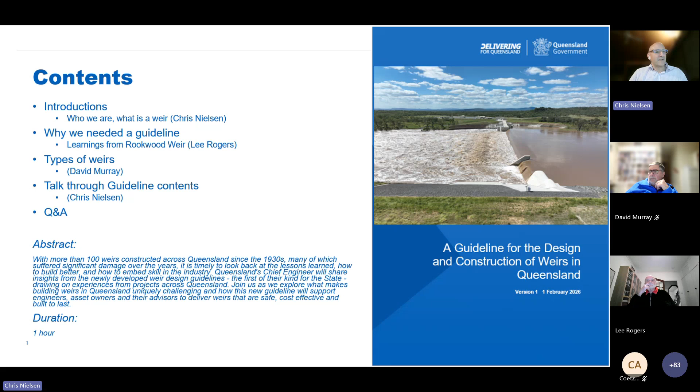Okay, I might just kick off then. So I'm going to be doing a bit of a tag team presentation. I'm going to be starting with a bit of an introduction and just give a bit of a scene setting. I'm then going to pass on to the two experts that I have in the room with me, Lee Rogers and David Murray. We'll then go through a series of presentations relating to the guideline, and then we can stop and have a Q&A at the end.

Very fortunate to have Lee and David working in the department after all these years. They can introduce themselves when they do their presentations, but just succinctly, public service in Queensland has been progressively reducing the number of engineers present, operating within the department and within the government. This has been happening since the 80s and 90s. We're now in a position where most of the work is done by consultants. There's nothing particularly wrong with that, but we do find that when it comes to making some of the bigger decisions, sometimes the knowledge base and the background and the context to making those decisions is not there. So we're very, very lucky to have David and Lee, and I really, they make me look good, which is great.

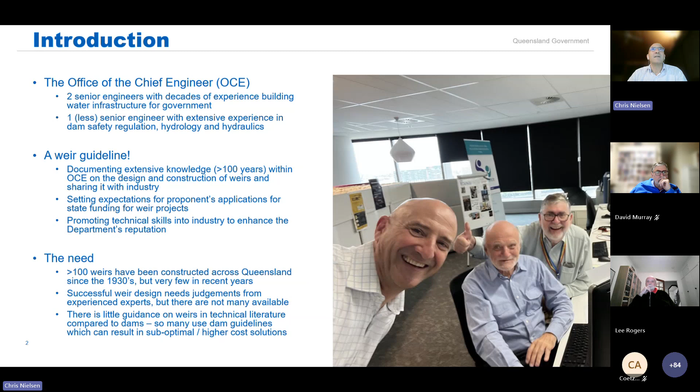I might leave it to Lee to talk a bit more about the basis for the Weir guideline. But I might just quickly touch on a couple of slides to explain the difference. And this is something which I didn't really pick up on myself until we started doing this exercise.

What is the difference between a weir and a dam? So a weir is a barrier across a watercourse intended to raise water levels on the upstream side for storage. So that sounds like a dam as much as a weir. It's generally located within the banks of the watercourse. Again, I guess similar to a dam, but differently. During flood events, it can be overtopped.

And usually when it is overtopped, and particularly when it's out of bank and severe flooding, you end up with a drowned flow condition at a weir. And that's quite an important distinction, because it means that once you get to some of the big flood events, which are the design constraints for dams, a weir is simply a submerged structure and it doesn't have those same forces. So it means that there's a very different force loading, and there's less safety obligations and less safety concerns as well as a result of that.

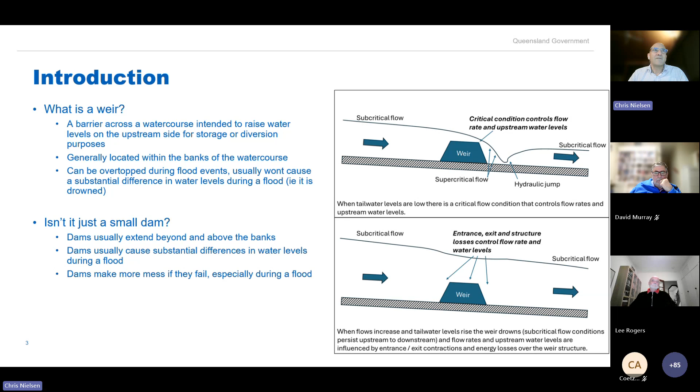As a flood gets worse at that particular dam or gets more severe, water levels rise, the force loading on that structure becomes worse, and you need a much, much stronger structure. Now, at the same time as that flood event was occurring there in 2019 with the gates open, further downstream is Aplins Weir. Now, as you can see, that weir is close to becoming drowned.

It's at bank full flows, and we're probably at a point where the tailwater condition is starting to result in less force loading on that structure than what it was when the flow was a bit less. So that's probably something to keep in mind. To me, that's an important distinction that we need to keep in mind between a weir and a dam. And that's really where we started from with this work.

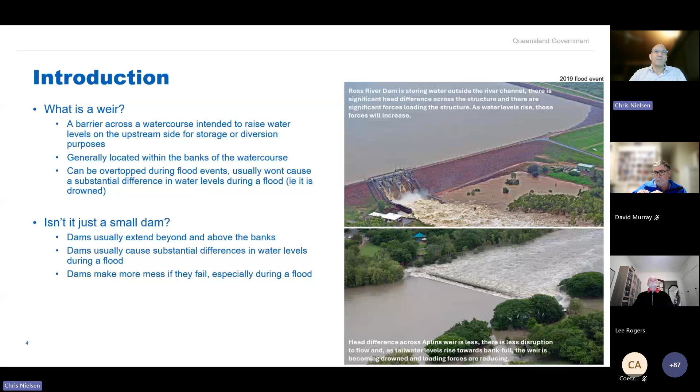So I'm going to hand over now to Lee, and he's in a way going to be giving us the origin story for the Weir guidelines.

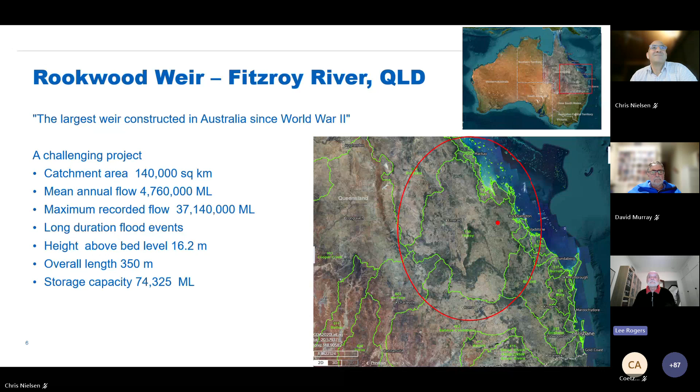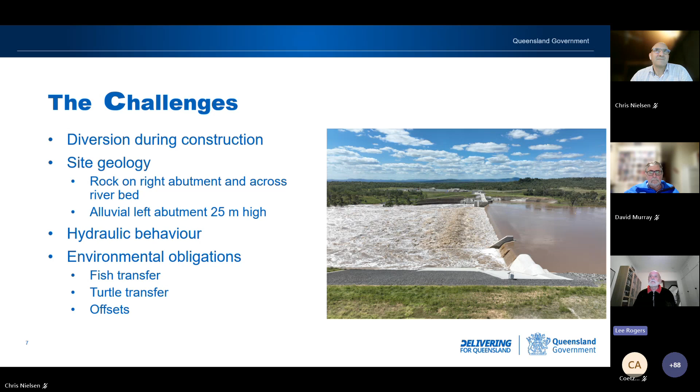And weirs now are far more complex structures than they used to be in the good old days because of all the environmental obligations, the requirements for fish transfer, in this case, turtle transfer for the first time anywhere in Queensland. And there were quite onerous offset obligations. The next slide, thanks, Chris.

So how was all this project implemented? Firstly, it was a joint Commonwealth government, state government initiative for funding of $367 million, which was the estimate at the start of the project. The balance of the cost was to be covered by Sunwater, which is the state-owned corporation in Queensland. It was also the development manager and became the ultimate owner of the weir. The design consultants are GHD. I'm not sure if they operate in South Africa, but they are a very big company in Australia.

The weir was constructed under an alliance arrangement with Acciona, which is a Spanish-owned enterprise, McCosker Contracting, a regional company in Queensland, Sunwater and GHD as its members. So the construction of the weir took 3 years, and the final cost was $569 million. The major cause of that cost escalation was the fact that the site was inundated 6 times during construction. The construction period was not 2 years, it became 3. There was a COVID shutdown for a month early on in the process. But that's the way of projects these days in Australia, cost overruns. So next one, thanks, Chris.

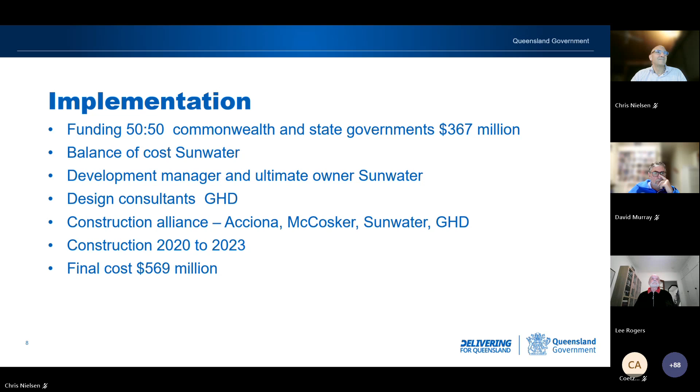So an important element of the whole weir design was the technical review panel that was established by Sunwater, comprised 4 engineers and 1 geotechnical engineer, all pretty eminent people. But the unfortunate reality was that only one of those persons had ever been involved in a weir project before, let alone a weir project of this size. David Murray and myself, David, the then chief engineer, were termed a client review panel. We had many decades of experience with weirs, David mainly construction, myself mainly design, as I've told you.

We met on all occasions with the technical review panel appointed by Sunwater and GHD, the designers, and Sunwater. It became evident that whilst the design group was pretty eminent in their own specialist fields, hydraulics or geotechnical or structural or whatever, none of them had actually been involved in a weir before, which is fairly disturbing, there being so few weirs built in Queensland in recent years. So our involvement was fairly intense. David and myself would have had a great deal to say at very many occasions during this whole process because, as I said, there was a lot of individual technical expertise, but minimal design experience.

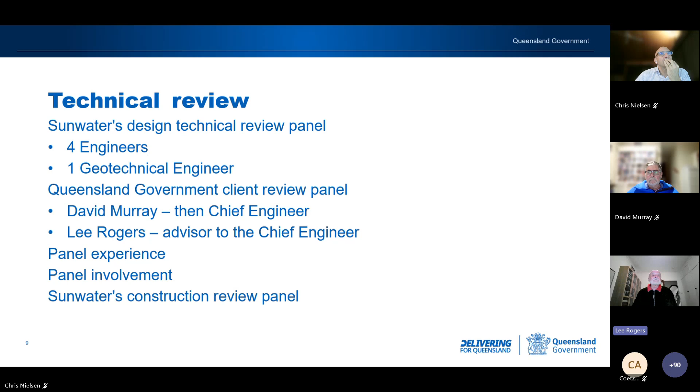Later on during construction, Sunwater also established a construction review panel. I didn't have any involvement in that. David might say something about it. So next one.

So one thing that we did do during this whole process was to try and raise the awareness of the factors impacting our weir projects in Queensland for the TRP members. We called it Lessons Learned from Weir Incidents. This is not exactly a new terminology because back in my days of director of design, I remember a book called Lessons Learned from Dam Incidents. It was called the Casagrande volume. I found it very useful to read that from time to time. It brings one back down to earth, the sorts of things that can go wrong.

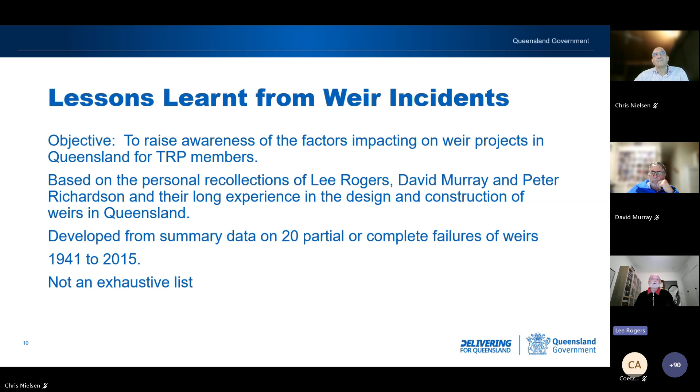So what we did was compile data on more than 20 weirs where there had been total failure or partial failure from 1941 to 2015. By no means an exhaustive list, but we sort of drew from that some primary causes of weir incidents in Queensland. So next, thanks.

So excessive afflux and inadequate protection works are probably the 2 causes of most of the problems that we've had with weirs in Queensland. The outcome in one case in particular, Marian Weir, if we look at the next slide briefly. Thanks, Chris. Marian Weir is a concrete gravity structure on the left-hand side. It's on the Pioneer River up near Mackay.

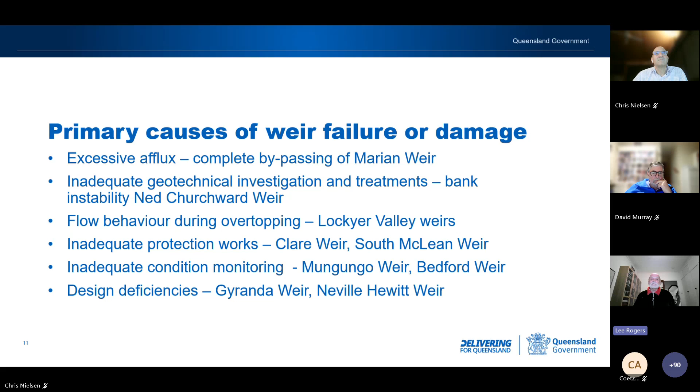I happened to be the project designer of this one, so I was very perturbed at the time, and I thought, why did this happen? So it seemed like there were two possible explanations. One was that there was some unusual load condition which we hadn't provided for, and the other one was that perhaps there was deterioration of concrete bond between that top lift and the lifts below.

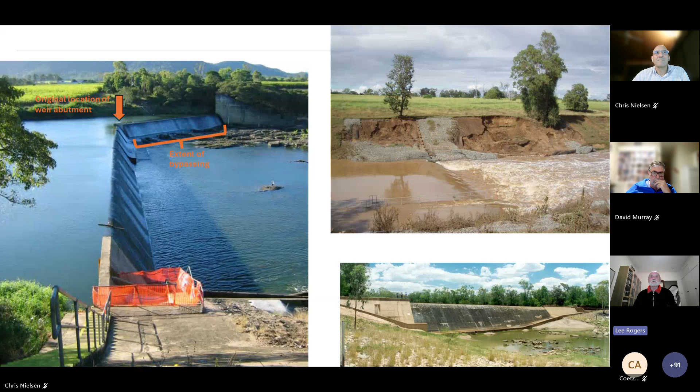So whichever it was, I'm not too sure at the end of the day, but the rumours in the local hotel were that the locals had been fishing for barramundi using small explosive charges dropped into the weir immediately upstream of the crest. And if that were the case, then there would have been very extreme pressures applied at the upstream face of the weir. So we don't know exactly why, but the top lift has been replaced with passive anchors, and it's still there, thankfully. Okay, next slide.

It was something that Dave was very keen to see done, because at Ned Churchward Weir on the Burnett River at Bundaberg, they had attempted to drive sheet piling to cut off gravels, and sheet piling didn't penetrate through the gravels, and the bank downstream became saturated on filling and whatever.

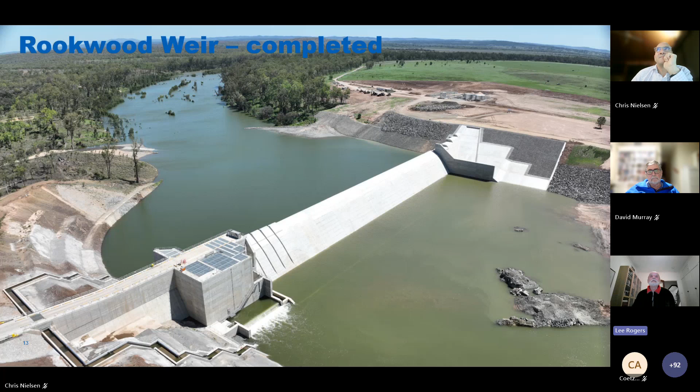I'll only talk about one lesson learned from Rookwood Weir. There are quite a few, but one that I think is the most important one in a way is the issue of hydraulic modelling for a weir like this. Initially, for the concept design, GHD used CFD modelling to examine flow conditions. I'm not sure that they were very conscious of the fact that it's just so absolutely critical that that left abutment withstand flood overtopping.

They plotted the pressure results and the velocities on upstream, downstream sections across the site and concluded that hydraulically the weir was behaving pretty well. They even concluded that a physical hydraulic model was not needed.

This was pretty concerning to David and myself, and we engaged an independent external reviewer to examine what GHD had done. That review concluded that, yes, they'd done CFD modelling competently, but it would be very unusual indeed not to use a physical hydraulic model for such a major structure. So Sunwater commissioned the building of a physical hydraulic model at their laboratories.

Next slide, thanks, Chris.

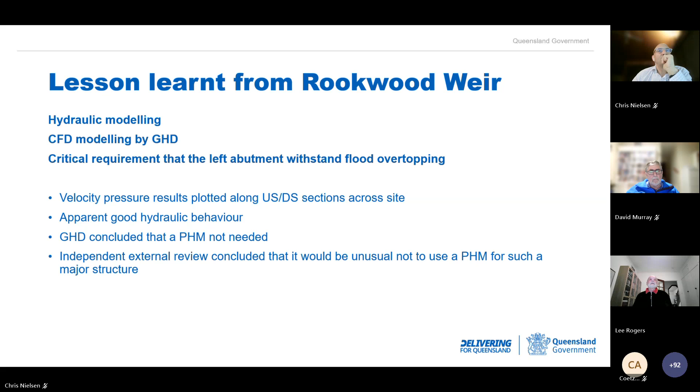So it all looks very pretty, but it doesn't actually tell you precisely what's going on. It didn't tell them the very strong reverse circulating currents that were occurring on the left abutment in the concept design, which didn't have that training wall in it. Useful, but it doesn't show the whole story. So the physical hydraulic model was built.

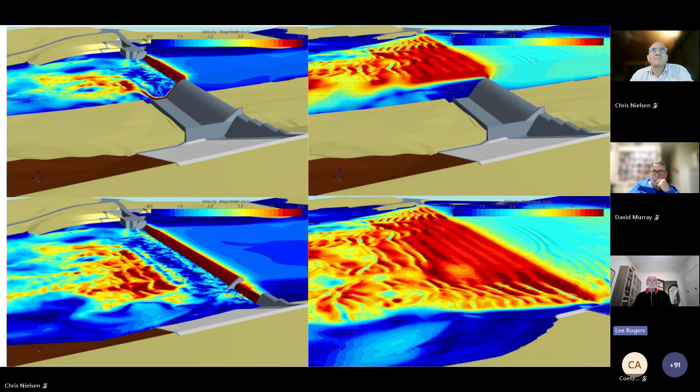It very clearly demonstrated that we needed to do something about that left abutment: strong recirculating currents and cross-river flow. The solutions that were very quickly developed in the physical model were the left bank training wall and that stepped left abutment.

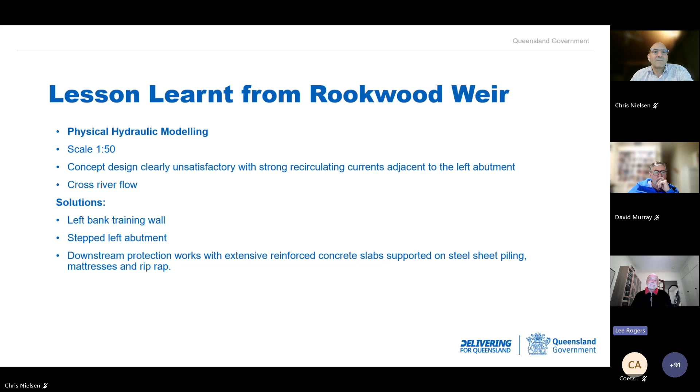As I said, there are extensive reinforced concrete slabs supported on sheet piling on mattresses downstream. That was essentially because the Fitzroy River carries a great deal of debris, fallen trees and what have you. And it was pretty clear from our experience that the mattresses probably were not going to withstand any impact from large timber debris. So that's what the physical model final arrangement looked like.

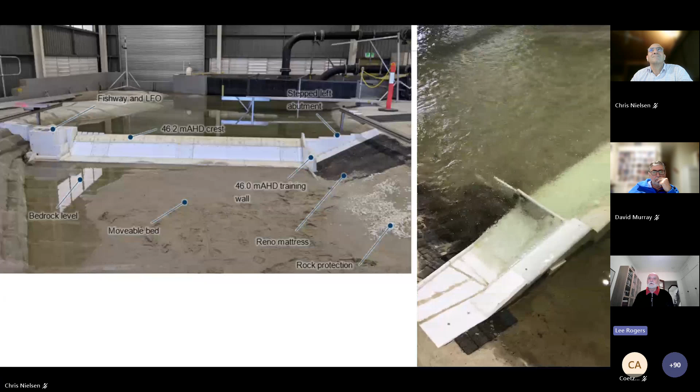A scale of 1 in 50 it was. A movable bed was put into the model, even though there was quite a lot of rock exposed. And on the right-hand side, that appears to be a video showing flow over the weir and over that left abutment.

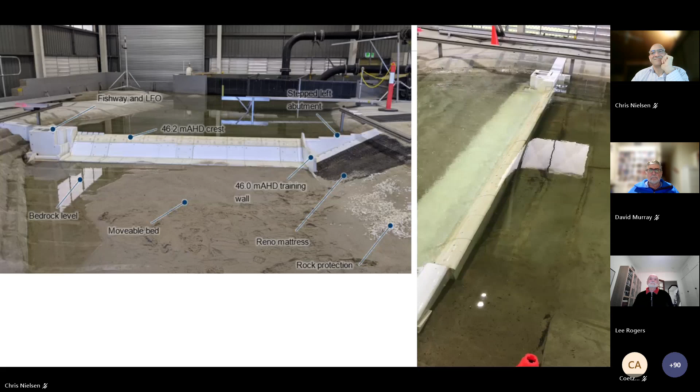As I said, there are many other lessons learned from the Rookwood Weir project, but I thought I'd just share this one with you as being probably the most significant. So thanks, Chris. That's enough for me. Thank you, Lee.

So I guess this slide might be a little bit premature, but just to wrap that up, once we'd got to that point, we had a couple of documents there that were really valuable, and they were internal. And I guess when we read them, we could see that they were the kind of things which industry really needed to remember, as much as anything else. And you also could see that there wasn't a lot of other documentation out there that had this kind of advice that Lee's just described.

So that was the catalyst to writing the guideline, was to take those two documents and start to think them through and to see what else we could add to that. I'm going to hand over now to Dave. Dave's going to talk through some of the types of weirs that we get in Queensland, and it's pretty much representative of the kind of weirs you get across the globe. So take it away, Dave. I'll jump to the next slide now.

Thank you, Chris. Well, just a bit of background myself. I graduated over 50 years ago. I had a scholarship with the Irrigation Water Supply Commission, started work with them. We became the Water Resources Commission. Yeah, I first started interacting with Lee in the late 1970s. And for a while, I was stationed out at that physical model laboratory as a design engineer, modelling a lot of weirs and dams for that matter.

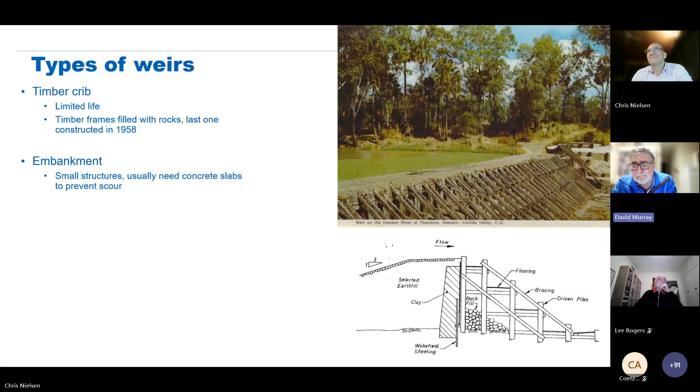Another type of weir is an embankment dam, usually small structures that use concrete slabs to protect against scour. I won't dawdle too much on that because I've never actually had any involvement with an embankment weir, so I really can't add too many more comments to that. Next slide, thanks, Chris.

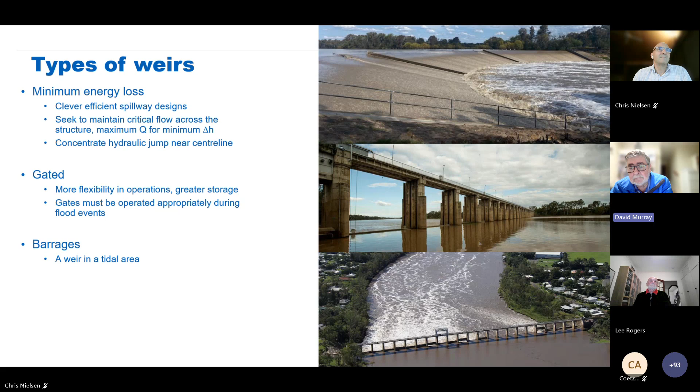What we see a lot of is weirs that are a combination of the concrete gravity weir and the steel sheet piling. Rookwood's a good example, but also Ned Churchward that Lee referred to. In our river systems, which are meandering type things, it's not uncommon to have good rock on one abutment and across the river, only to be faced with alluvium on another abutment. One of the challenges of that alluvium Lee touched on - I nearly got caught because I was construction manager on Ned Churchward.

With these meandering river systems, over hundreds of millions of years they move around and leave these channels of dense gravels. If you get anything much over 12 to 15 millimeters, you give up on driving steel sheet piling through, so you need another form of cutoff.

At Rookwood Weir, we knew the geotech had picked up the paleo channels, so we knew the steel sheet piling cutoff wouldn't work, so we got a slurry trench. But at Ned Churchward, they did a lot of geotech and it did not pick up any paleo channels, so the designers went ahead and specified steel.

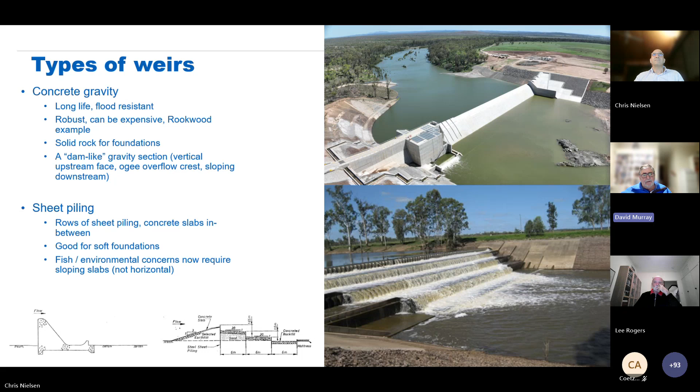Next slide, Chris. And the next one. That's it, that's it - geez, that's me. My bit was quick, my bit was quick and easy. Thanks, Dave.

So I might just spend the next 10 or 15 minutes going through some of the bigger picture side of the guideline and some of the contents that are in it. We'll start with the critical requirements. So what does a weir need to do?

A weir needs to have an ability to store enough water to meet its functional purpose. So how much water is required, and can the weir provide that amount of water?

Number two, can it withstand flood overtopping without significant damage? So once you've known it can hold enough water, will it be able to stay there with flooding?

Requirement 3, it should not cause harms or negative impacts considered unacceptable to stakeholders, and that captures a range of things. I've written that as 'considered unacceptable to stakeholders' - those stakeholders might be local residents who don't want it there and might want to set fire to it, but it's also regulators, compliance people, and various stakeholders who might consider the environmental impacts to be unacceptable, for example.

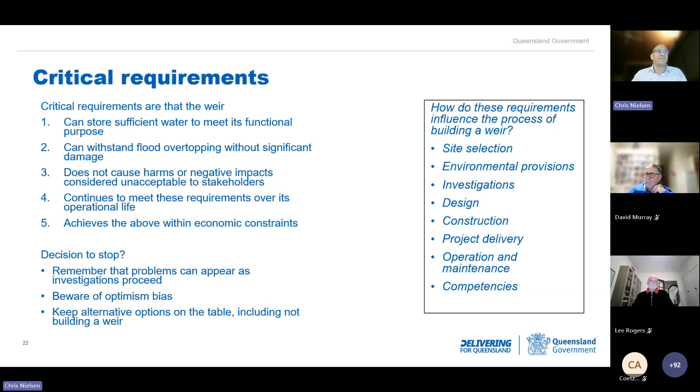Now, site selection - I kind of like this. The ideal site is close to the water users, so you don't need much pipe work or channels to get the water to them. It's got to have good catchment yield, a really nice big catchment upstream with lots of rain, and that rain's got to fall all the time - you can't have a drought, that's no good. You need sufficient water storage, but not too much, just enough - Goldilocks water storage. You need tolerable environmental impacts, tolerable social impacts, and you've got to put it somewhere with some pretty good geology.

If you don't want bank erosion problems, it's best to have a nice straight river section with stable banks. And if you're going to build this out of a particular type of material, you want good roads and nice access to quarries.

You're talking about a list of things there which you're never really going to be fully achieving, so you need to think about options. Definitely when coming up with a proposal to develop a weir, have a good think about all the different options available, different locations, construction methods, and the whole range of things.

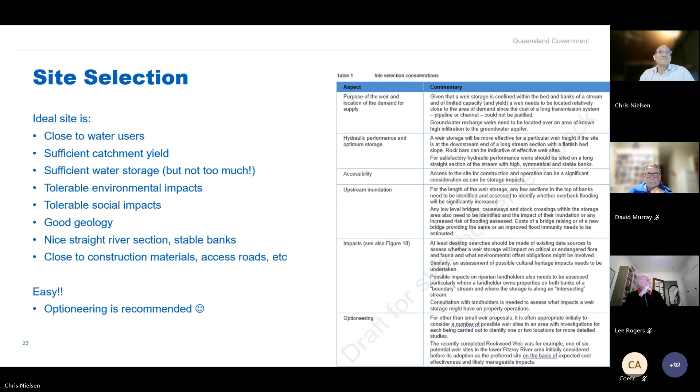We have this famous turtle that happens to breathe out of its butt. It's a very rare turtle living in the Mary River. I think it also has a weed, a green mossy thing it grows on its head like a little mohawk. So we have this green mohawk, ass-breathing turtle.

Another thing we have is a lungfish. I think there's also lungfish in South Africa, but they're an incredibly unique and rare type of creature, only seen in six rivers in southeast Queensland. And in general, most of the fish in Queensland and Australia are quite lazy - not like the salmon or trout you might see in other countries leaping out of the water. Generally we have pretty useless, lying-around fish that don't really like to be challenged by a structure.

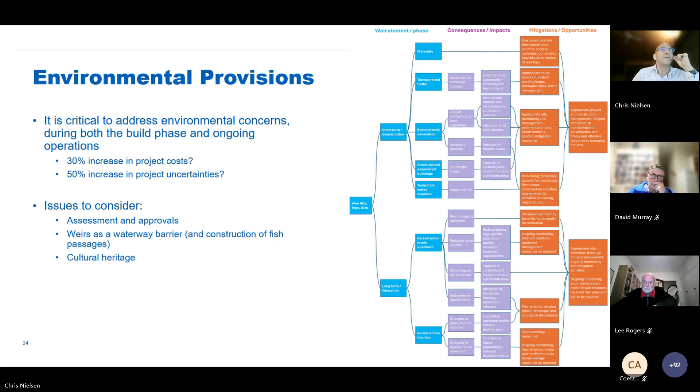Investigations are necessary, and they build on each other. So you need to do your investigations in a sequence that makes sense, so you're not wasting time or effort until you're sure you're moving in the right direction. This includes things like surveys, foundation investigations and geotech, identification of construction materials, looking at storage impacts and some geography aspects, environmental surveys, and stakeholder engagement.

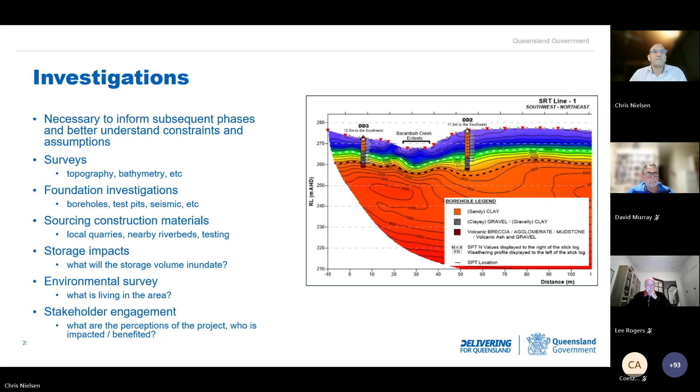When you're doing design, you need to consider the demand - how much will people be willing to pay for the water, and will there be enough water to fill the weir? You need to do hydrology and hydraulic modelling to identify the storage volumes and to understand what happens during flood events.

I'm not 100% familiar with the climate in South Africa, but when I've been there I've seen terrain and geography very similar to Queensland and New South Wales. I'd say one difference is that Queensland is exposed to cyclonic activity, so we have extreme variability in our climate because of that. In some areas there will be sustained periods with very little rain, then a cyclone comes along and we get an extraordinary heavy flood event. That creates a lot of challenges for us.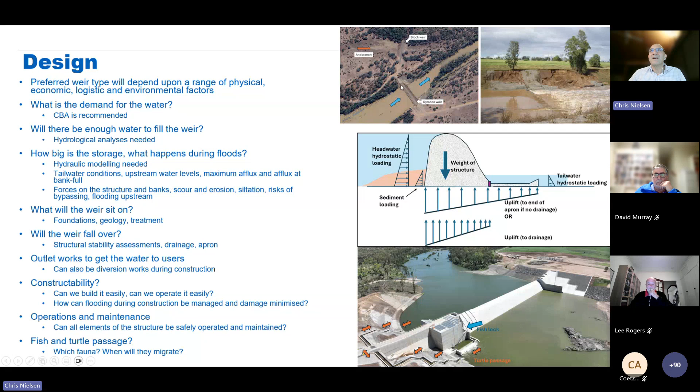Just a few other things there, I'll skim over them quickly. One thing in that top corner, we've got this concept of a block weir. This is something to keep in mind - if you build a weir, be careful that the water won't bypass it. You need to take the outer branches and make sure they're dealt with as well.

We had some specific hydraulic criteria, and these were quite contentious when we started engaging with some of the hydraulic engineering gurus around the place. But they've got a fairly good, solid basis in past experience, and they are very good rules of thumb. And there are hydraulic explanations for them. Happy to share the guideline when we publish it in the next month or so.

Bank full is a critical flow condition. So once the water is at bank full, you really don't want the weir to be causing that much afflux at that flow condition. That has a number of reasons, because once the flood goes above bank full, then you're impacting properties. So you're going to be getting that unacceptable flood impact. But then also that afflux is a proxy for the energy that will be imposed upon the banks adjacent to the weirs.

And quite often in Queensland at least, with the nature of the weir locations, mostly being in particular locations along river systems in the coastal zone of the floodplains, and the types of material we often encounter, that bank-full afflux threshold is a really good indicator of whether or not there will be bank erosion.

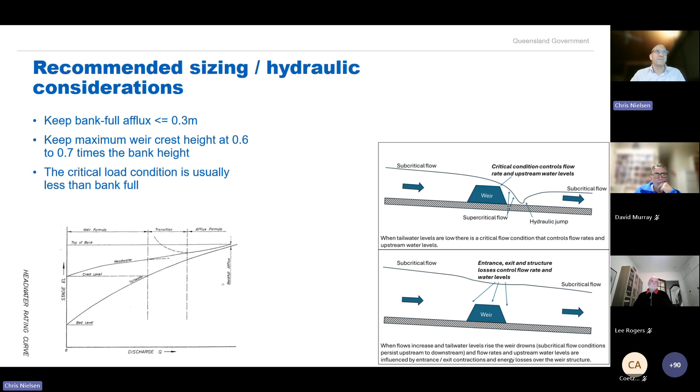Just very quickly touching on construction, I'll focus primarily on the challenge of managing through floods. Quite often we have a requirement, particularly for dams, less so on weirs, but construction during dry season is quite important. And then you need to think about how long you will have if a flood was to come along. So do you have a rain gauge upstream, and then you know if it goes above a certain millimetres per hour, that in 2 days' time a flood will come along and you'll need to clear your site out and get ready.

They're the kind of questions that you need to ask, and you need to start running some concepts of risk assessment. You don't want to be caught short, but at the same time, maybe you need to accept a certain risk that you will be.

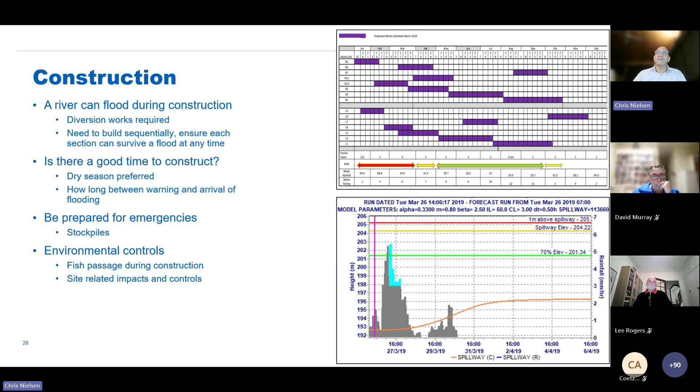I've spent a lot of time in my previous roles. Before I was the chief engineer, I was the dam safety regulator in Queensland, and a lot of issues associated with poor project delivery come about from the governance and the oversight of those particular projects. Just a couple of things. There's a lot of discussion on some of the aspects that could be considered, but two things I've highlighted there. The weir owner should be an informed decision maker. They should have appropriate technical understanding of the risks. It's a simple thing to say, but it's not that easy to achieve all the time.

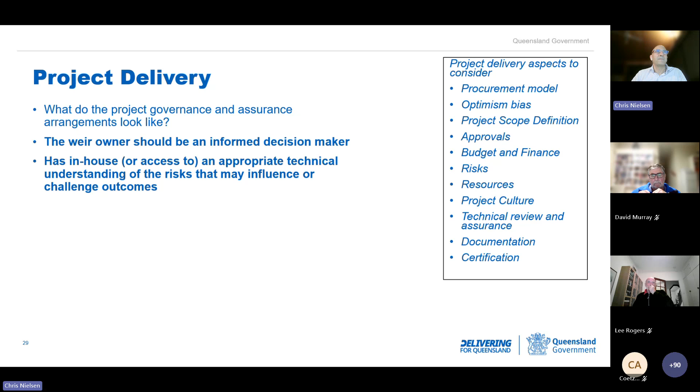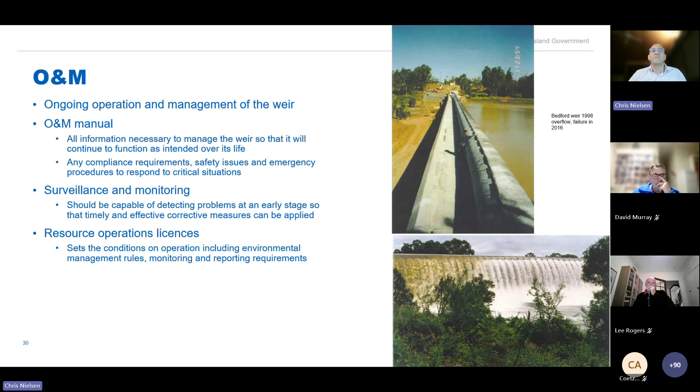Operation and maintenance. I probably won't go too much into this, except to highlight this picture on the right. This is one of those examples which you don't really want to hear about. Inflatable weirs were being installed in a few places, on dams and weirs in Queensland and around the world. They were a fairly good idea because they were a fairly quick and easy way to increase upstream storage capacity, and then you could quickly deflate it and get that subsequent flow release if you needed it. Unfortunately, this one burst and caused a human-caused flood wave downstream, which resulted in the death of a child. Since then, all of those inflatable weirs have been decommissioned.

We did expand on some of the lessons learned. I probably won't go into that too much. One of the things I might just quickly highlight, though, is two things. The challenges interpreting CFD. Through Engineers Australia, we're in the process of publishing a guideline on the use of CFD, which touches quite a lot on the problem definition associated with doing numerical and physical modelling. And that's about asking if the tool is going to provide the accuracy that you require to make decisions for a particular problem. Not always a straightforward question.

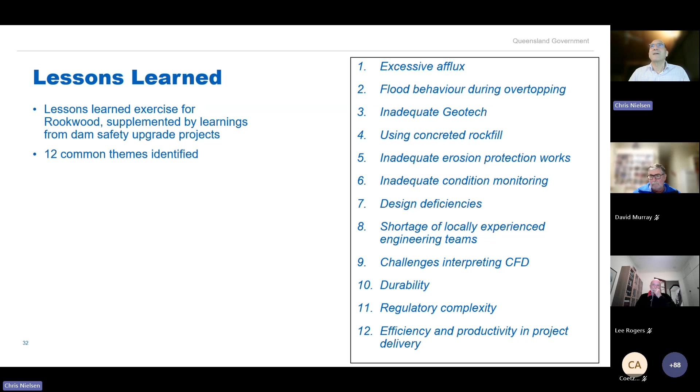The other one is regulatory complexity, and I touch on that because quite often there becomes an engineering delivery versus environmental concern, and it becomes almost like the two don't want to communicate with one another until it gets to a point of a decision, and then it becomes quite a contentious decision. There's a lot of effort required to make sure that a project comes to a conclusion with everybody smiling and everybody happy.

So we follow a very rigorous process to make sure that everybody gets a look at the guideline. I apologise that I didn't pass it on to the South African young professionals. That was remiss. But we're now at a point where I'm waiting on the signature of my executive director, my deputy director general. And I'm hopeful that we will have this thing up and published for everyone to have a look in September.

And for those of you who feel like making the journey to Australia in October, I'll be doing a presentation at the ANCOLD conference, which is going to be down in Hobart, which is a very lovely part of the world to be in. So with that, I'll end my preso.

Apologies for being a few minutes over time. I blame David for talking too much. But I think it's probably better that you had more from those two rather than me. So I'm really happy to hear if anyone's got any questions. Thank you.